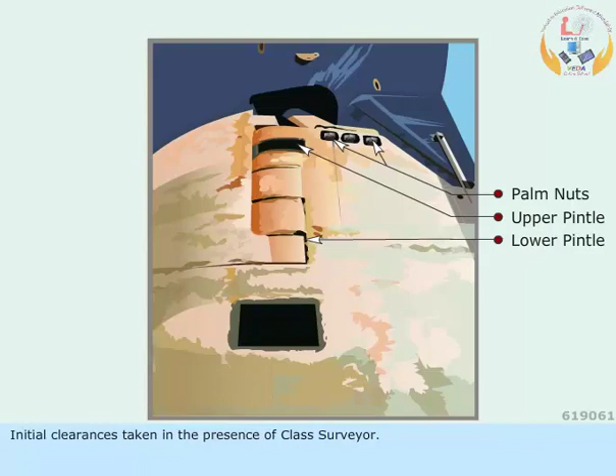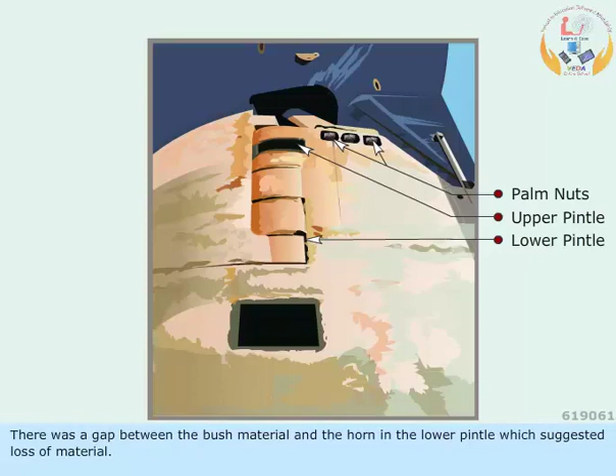The top pintle bush was distinctly worn. There was a gap between the bush material and the horn in the lower pintle, suggesting loss of material. It was decided to renew the bottom bush too.

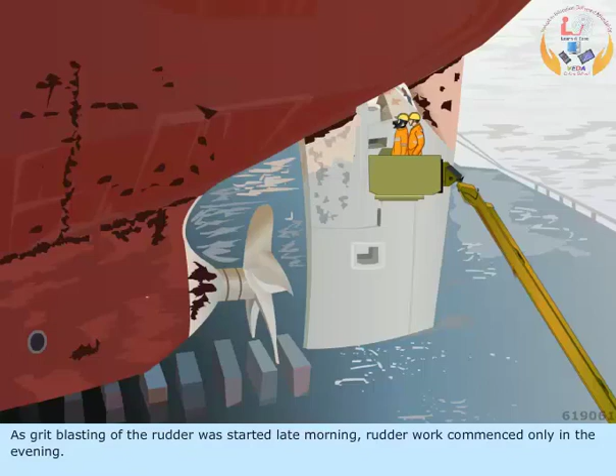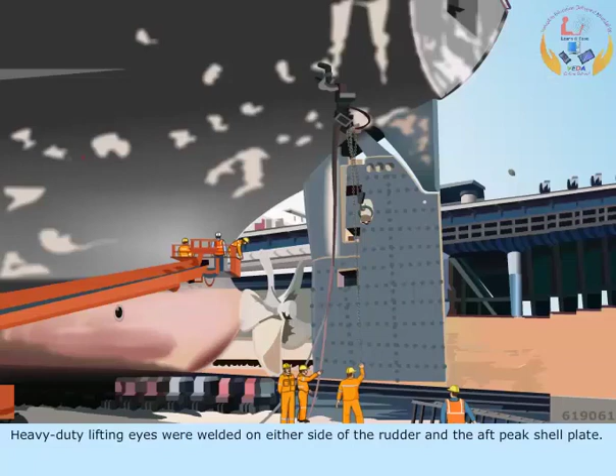As grit blasting of the rudder was started late morning, rudder work commenced only in the evening. Heavy-duty lifting eyes were welded on either side of the rudder and the aft peak shell plate. Rudder pintle nuts were slackened.

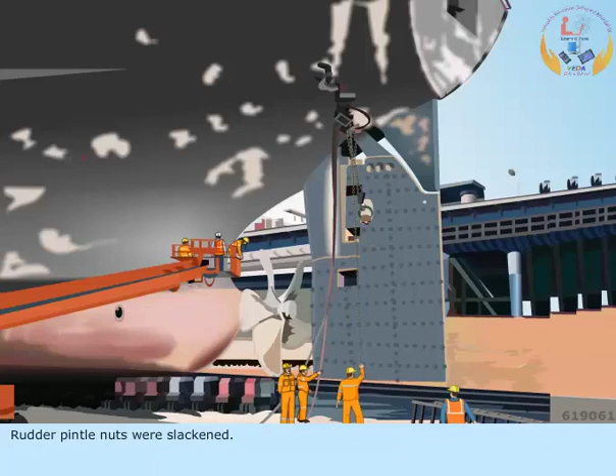On the third day after docking, the rudder was unshipped. Work commenced on the rudder stock. The tiller assembly in the steering flat was dismantled. The new rudder stock, tiller and the unshipped rudder were transported to the workshop.

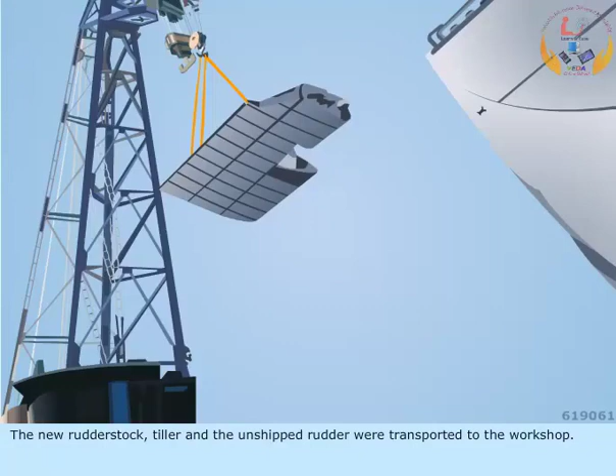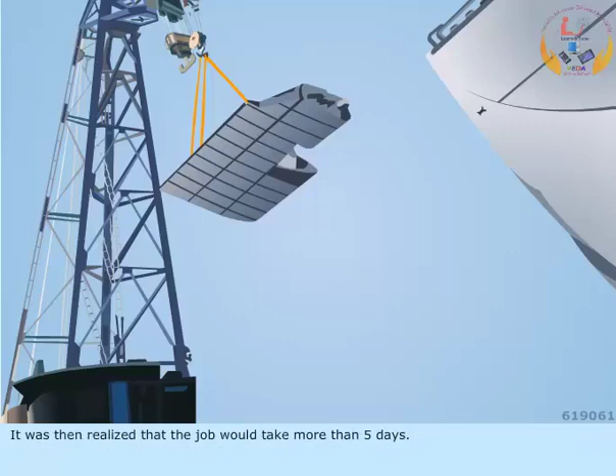No firm decision was taken on how to bed the tiller on the stock. However, it was clearly conveyed to the shipyard that, as the stock was new, any grinding required was to be done on the tiller alone. It was then realized that the job would take more than 5 days.

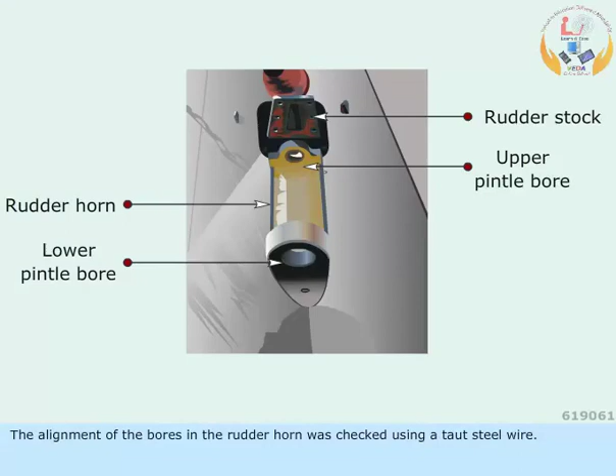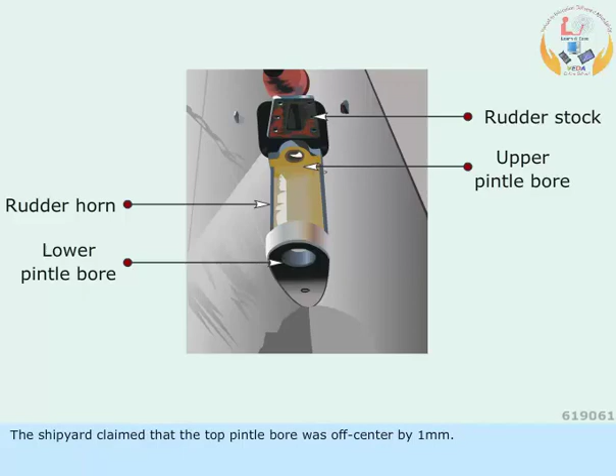The alignment of the bores in the rudder horn was checked using a taut steel wire. The shipyard claimed that the top pintle bore was off-center by 1 mm. As the accuracy of the method of measurement was in doubt, it was decided to recheck using other methods.

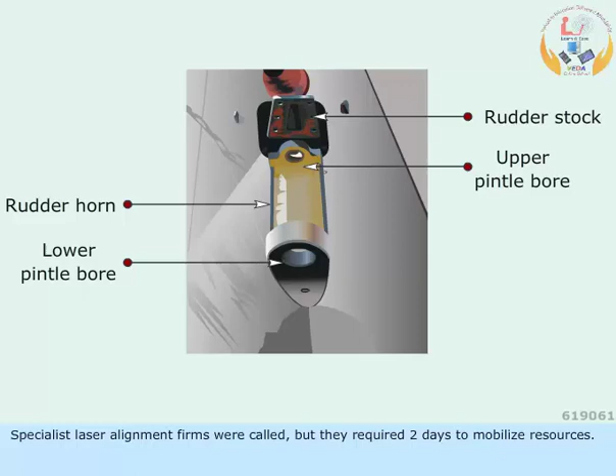Specialist laser alignment firms were called, but they required 2 days to mobilize resources. It was then decided to conduct all alignment checks using the shipyard's resources.

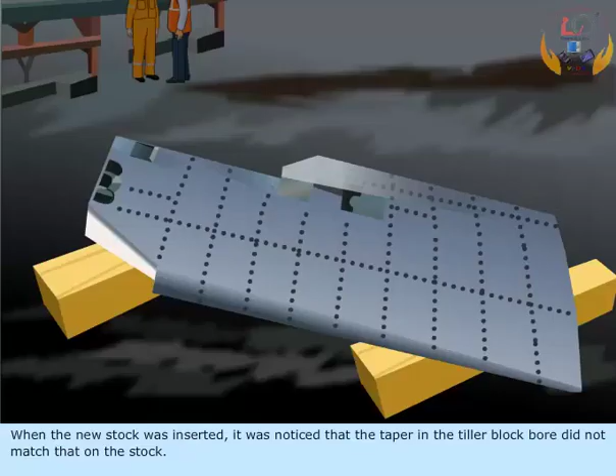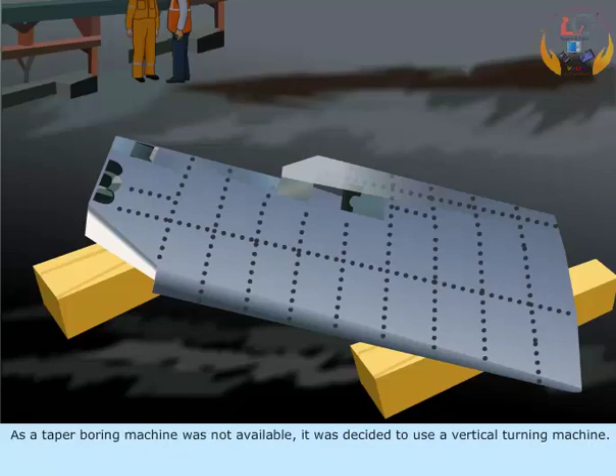When the new stock was inserted, it was noticed that the taper in the tiller block bore did not match that on the stock. As a taper boring machine was not available, it was decided to use a vertical turning machine.

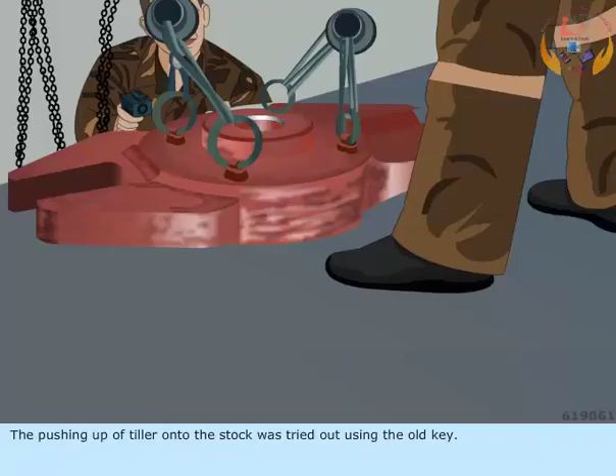The tiller assembly was machined down by 0.2 mm over a length of 30% from the top to get the necessary bedding. The pushing up of the tiller onto the stock was tried out using the old key. However, when the new key was used, further modifications to the new key were required.

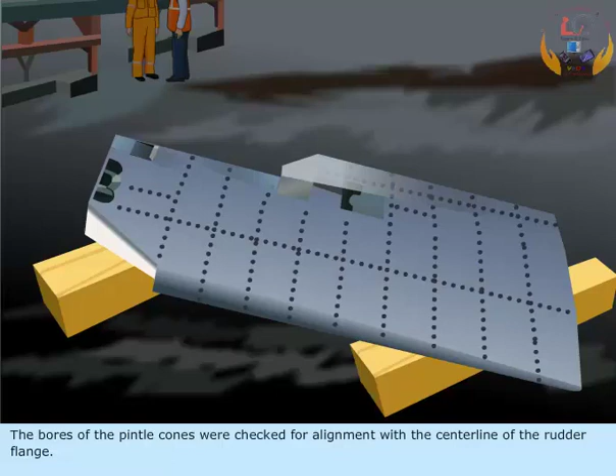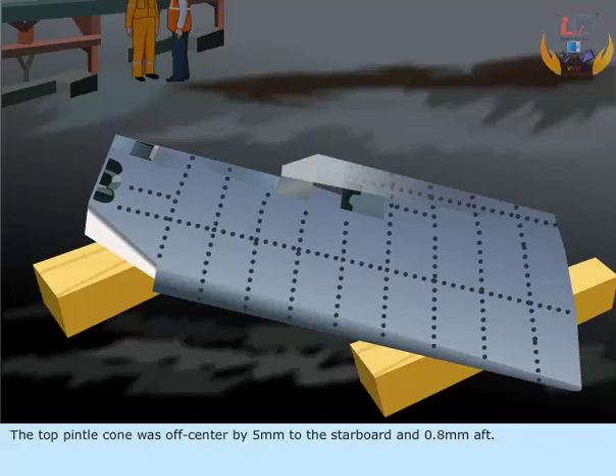Alignment check of the rudder revealed that the entire assembly was twisted. The bores of the pintle cones were checked for alignment with the center line of the rudder flange. The top pintle cone was off-center by 5 mm to the starboard and 0.8 mm aft. The lower pintle bore was off-center by 4.5 mm to the port side.

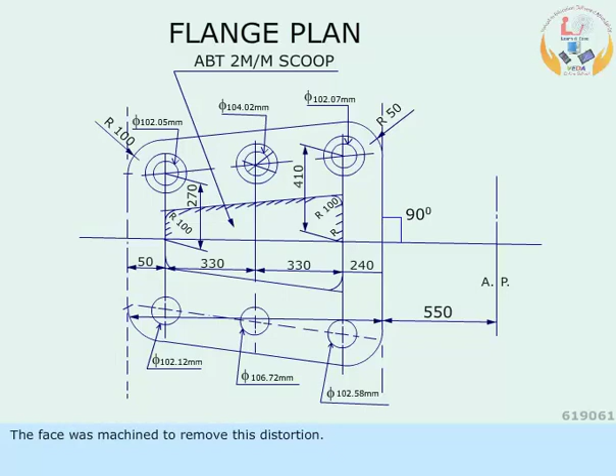This was a major setback. The rudder flange was found distorted. The face was machined to remove this distortion. This was done after completion of bedding.

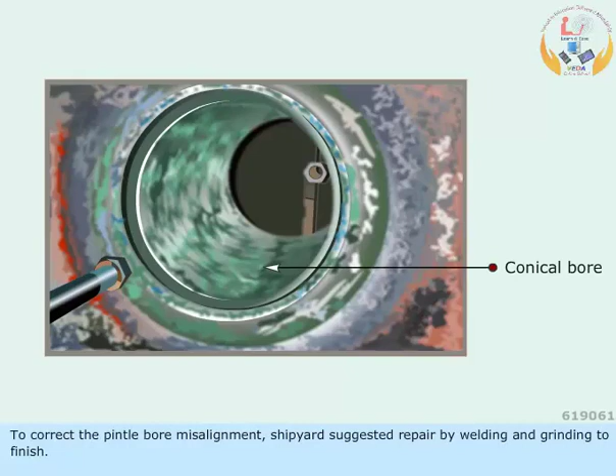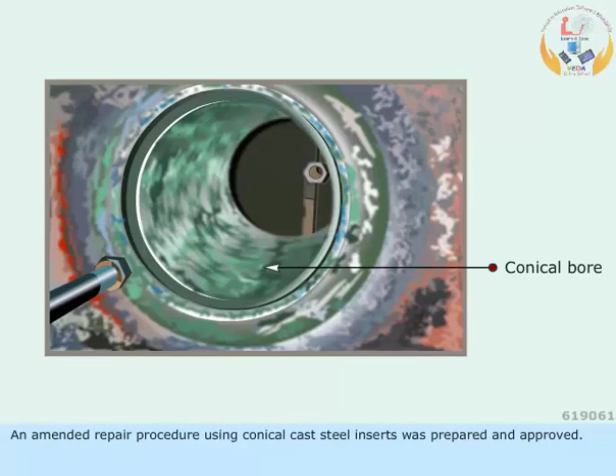To correct the pintle bore misalignment, the shipyard suggested repair by welding and grinding to finish. Class rejected this. An amended repair procedure using conical cast steel inserts was prepared and approved. Material for the inserts and lower pintle bush was sourced.

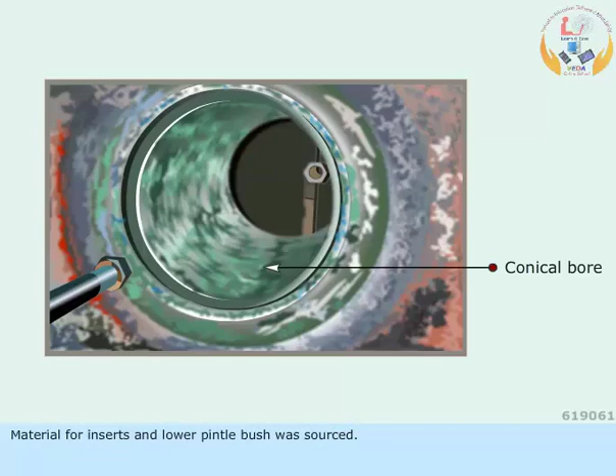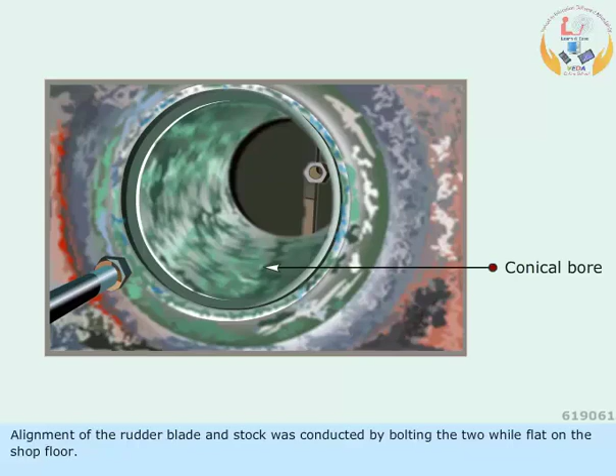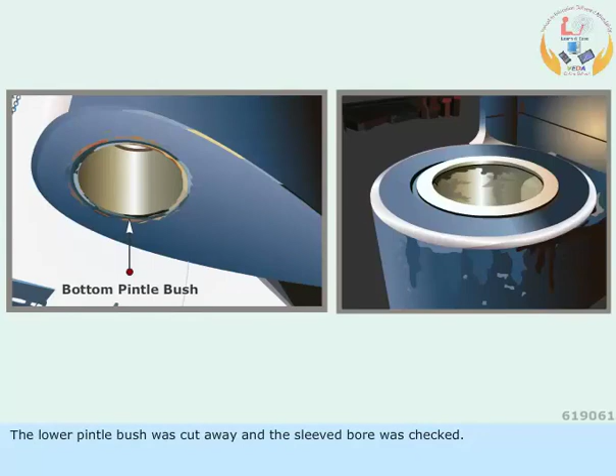The new inserts were cold shrunk fit on the rudder and welded under controlled conditions. Alignment of the rudder blade and stock was conducted by bolting the two while flat on the shop floor. This was checked by the taut wire method in both horizontal and vertical planes. The lower pintle bush was cut away and the sleeved bore was checked.

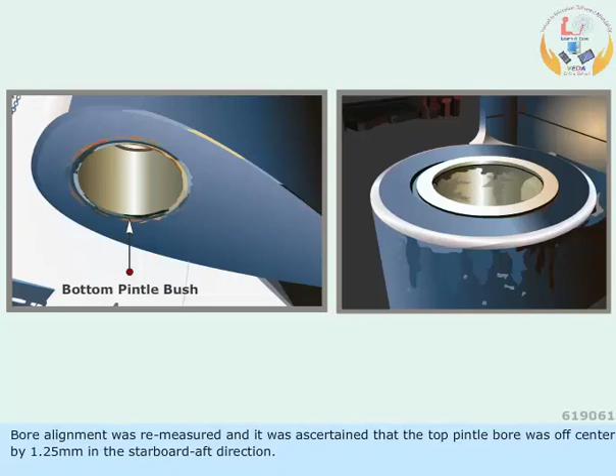Bore alignment was remeasured and it was ascertained that the top pintle bore was off-center by 1.25 mm in the starboard aft direction. This was corrected using a portable boring machine.

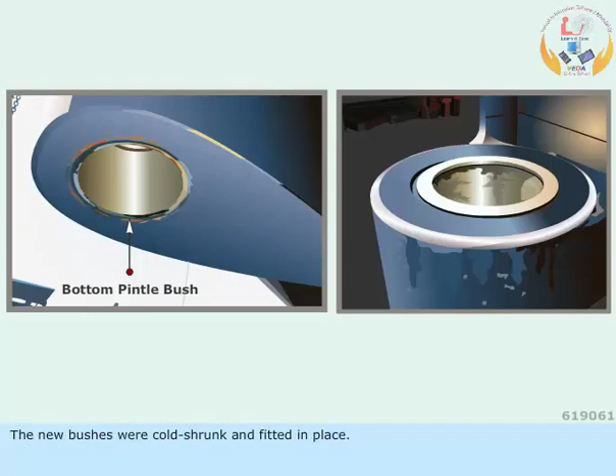The new bushes were cold shrunk and fitted in place. The carrier bearing, tiller and stock were assembled. The rudder was taken to dock and lifted into place.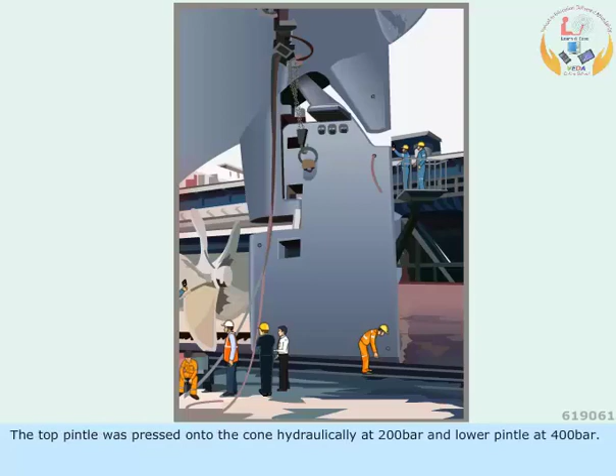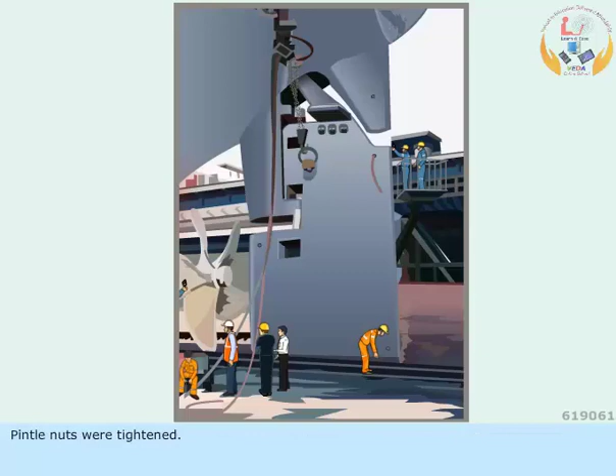The top pintle was pressed onto the cone hydraulically at 200 bar and the lower pintle at 400 bar. Pintle nuts were tightened. New jumping blocks were welded in place and jumping clearance adjusted to 2 mm on both sides.

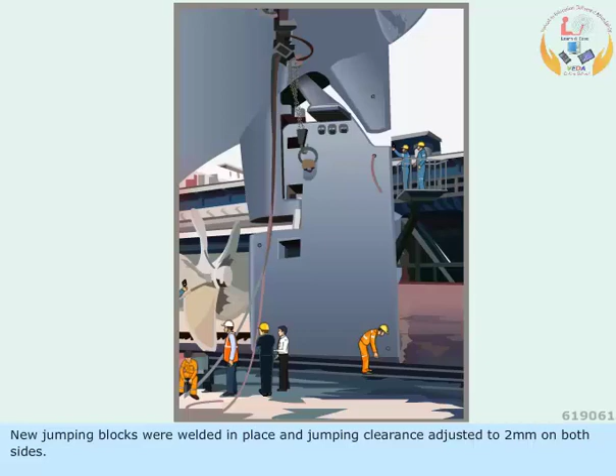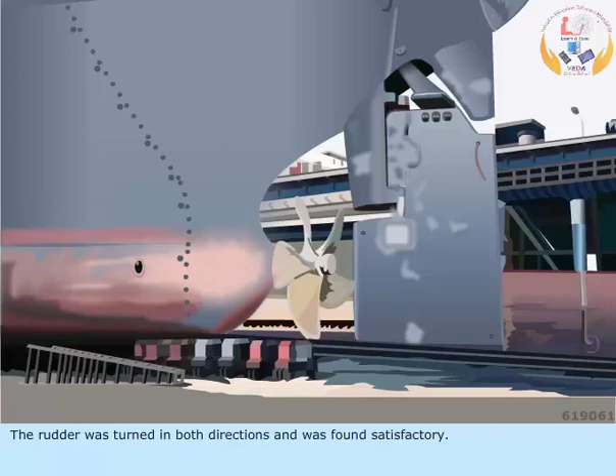The final pintle clearances were taken and found satisfactory. The locking arrangements and cementing of the pintle nuts were completed. The access doors were welded. The rudder was turned in both directions and was found satisfactory. The total delay was about 30 days.